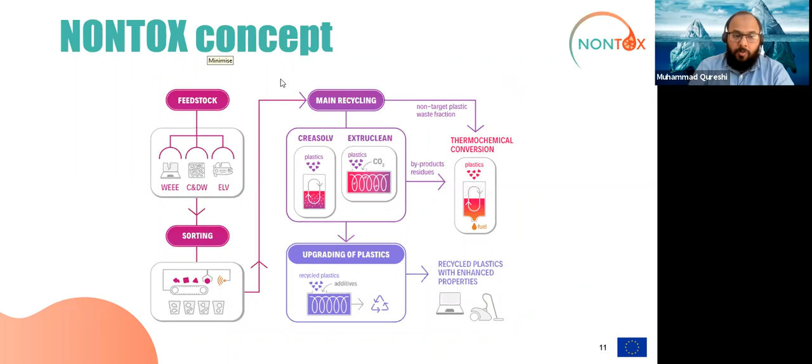So if you press that pointer, this is the first tool in the toolbox of technologies. This is where we are developing at VTT intelligent sorting of the different polymers using an active hyperspectral sensing technique, in which we can classify the plastics containing bromine or flame retardants.

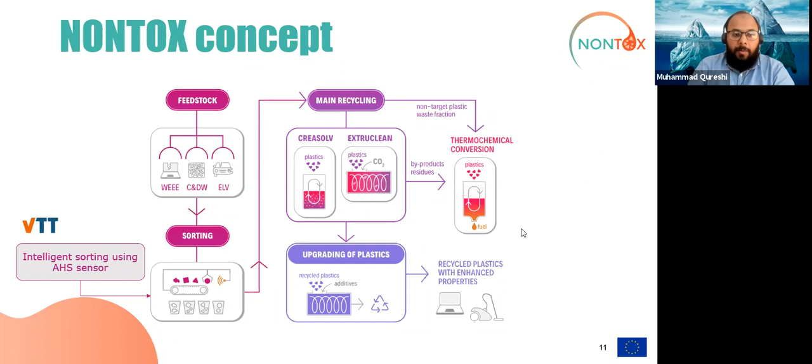So the next step from this sorting is the recycling technique, and in this box you see that there are a couple of these technologies called CreaSolv technology and ExtruClean technology, which we call physical and mechanical recycling technologies. And these are the core technologies used for the recycling of hazardous plastics. Fraunhofer in Germany and AIMPLAS in Spain are looking at these technologies for recycling the plastics containing flame retardants.

Now, as you can see, from the main recycling box there is one arrow going towards thermochemical conversion, which is basically the non-target plastic waste fractions. So if we broadly classify the plastics, there are the ones that are suitable for this recycling technology in CreaSolv and ExtruClean, but then there are the ones which contain contaminants and are not suitable for these technologies. So those non-target plastic fractions are still treated with thermochemical conversion technologies, and also the byproducts and residues coming from the main recycling technologies are directed to the thermochemical conversion technology.

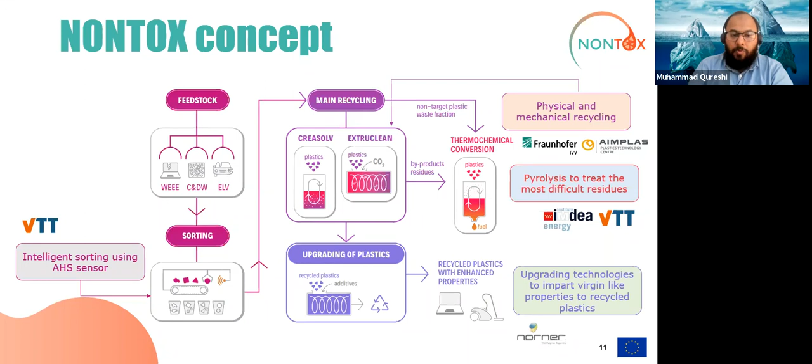In this case, it is pyrolysis, and pyrolysis is the core technology which is now treating the most difficult residues, and it's being developed at IMDEA in Spain and VTT in Finland. So with the thermochemical conversion technology, you can convert the plastics into valuable hydrocarbons. The arrow coming down from the main recycling technology is basically the recycled plastics, which can then be upgraded with the use of special additives to get to a point where these plastics can be used in high quality applications.

So as you can see, we can finally go to applications where virgin-like properties are needed. So the recycled plastics from these technologies can compete very well with virgin materials. So this is how we are trying to close the loop of the plastic waste, by not letting any of the plastics move out of this whole value chain.

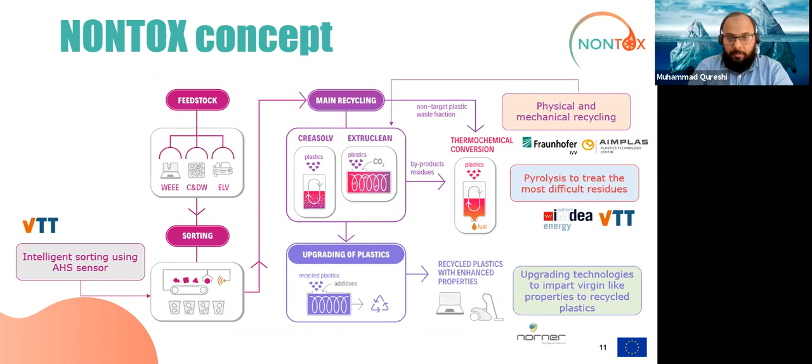To the next. And then if I talk briefly about the potential impacts that we estimate from NONTOX. We see that with this concept we are able to recycle approximately more than 2 million tons of these types of plastics each year in Europe. We estimate up to a 74% increase in the recycling capacity in Europe with the use of these NONTOX technologies. We can also assume with our approximations that approximately 2 million tons of greenhouse gas emissions can be avoided. We also believe that approximately a threefold increase in jobs can be seen with the use of the NONTOX concept in the recycling sector.

Then I'll talk briefly also about the policy recommendations. In the NONTOX project, we had the task to investigate the landscape of the different regulations, frameworks and directives encompassing the whole NONTOX concept, how this type of plastic waste is currently handled, and what the relevant legislations are that affect the whole value chain. So we have looked into different regulations, POP regulations, REACH regulations. We have looked into RoHS criteria.

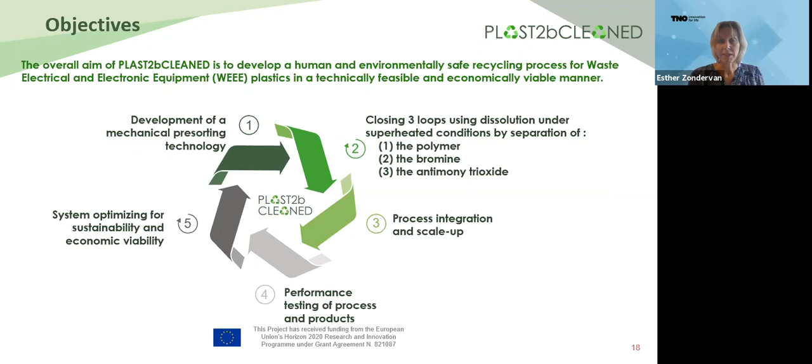TNO is coordinating this project, and we are not doing this alone. We're working with research institutes Fraunhofer and Gaiker. What's important is that we connect the whole value chain to this project: Coolrec as a recycling company, Ducam for the engineering and process equipment, and Elex as a plastics producer of ABS.

Electrolux is end user of the plastics. ICL handles bromine recovery and connection to the chemical industry, and for antimony recovery we have Campine on board. We also have Sustainable Innovations for dissemination and exploitation, which Marianne did an excellent job presenting today.

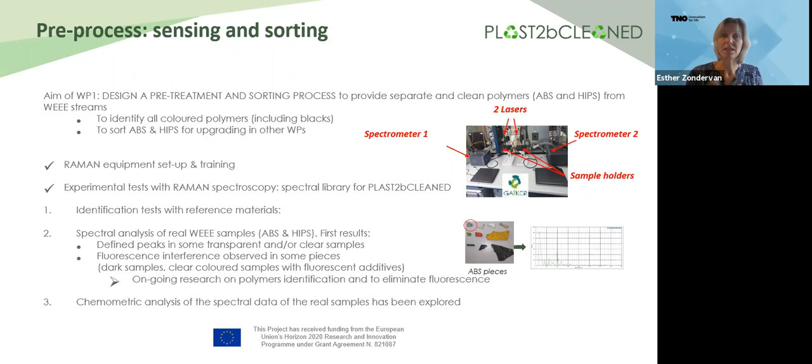So where are we now? We set up our equipment, made a library, and we are now optimizing for the colored and dark samples. This is ongoing research.

The next step is the dissolution technology, where we recover the polymer, the antimony trioxide, and the BFRs. This is currently running at lab scale, and we are preparing to scale up to TRL 5-6.

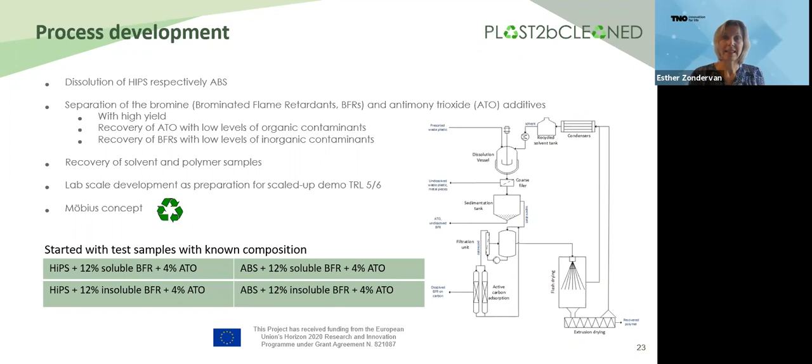At lab scale, we are now at about 100 gram scales, and we started with the preparation of test samples with known composition, making typical variations of the sample. Both HIPS and ABS were used, with both soluble and insoluble brominated flame retardants, to check our process. Here you can see some of the process.

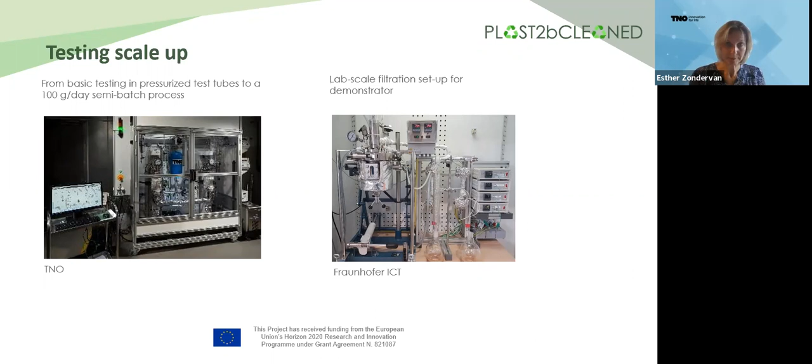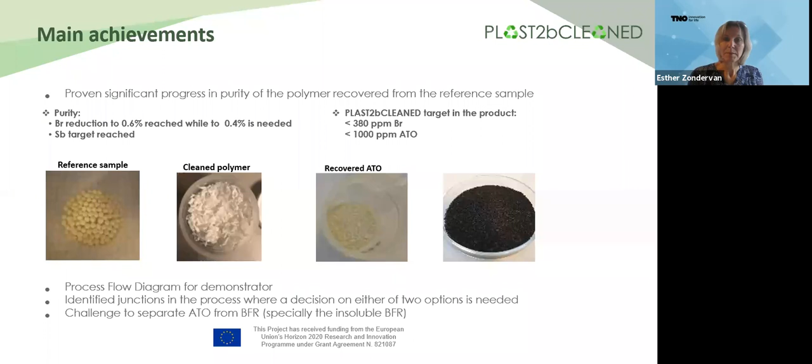As I already said, we do not only look at the technical issues of this process, but also for the economic and environmental assessment. And from the economic assessment, we already see that this process is in principle economic viable.

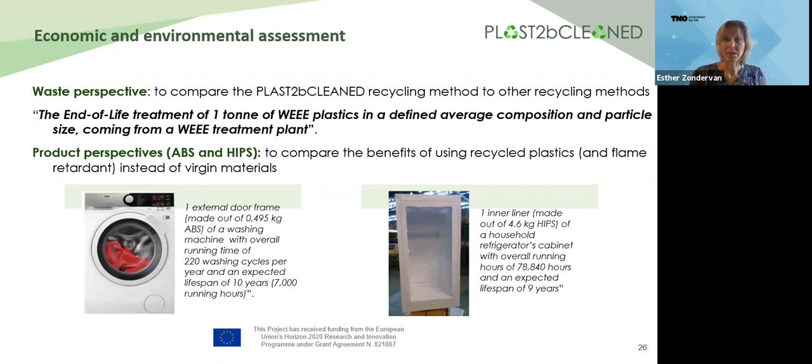Also from a sustainability perspective, we looked at the impact for the environment, and we did that in two ways. We looked at the product from a product perspective, as you can see there on the lower picture: one is the door from a washing machine, and the other one is the inner liner from a refrigerator cabinet. And that is from the product perspective, and also from the waste perspective. We just looked at the end-of-life treatment of 1 ton of WEEE plastics, and then compare it to an incineration, which is done currently.

Here you can see some of the first results. We're now performing an in-depth life cycle assessment, but this is just from the scan. There you see that we see a clear improvement by using the PLAST2bCLEANED process for HIPS and ABS. So this is the comparison of brominated HIPS and brominated ABS compared to municipal waste incineration, with energy recovery. Here we looked only at the polymer, but we look now also in the in-depth scan at the benefits of the bromine and of the antimony trioxide.

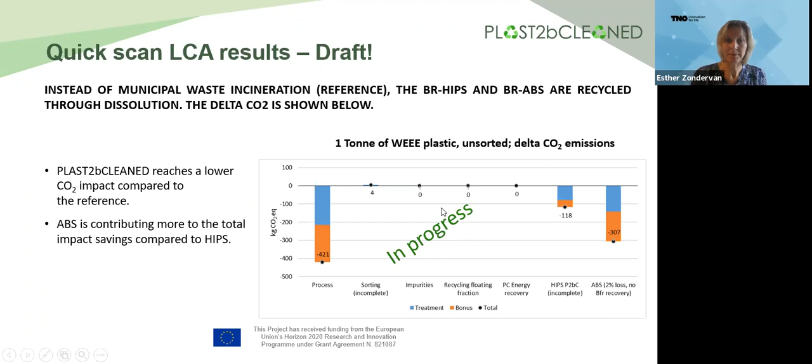So then I'm coming to the end of my presentation, and I would like to finalize where I started. I think with PLAST2bCLEANED, we are very good on our way to develop a nice process for the mechanical sorting technology, so sorting the different types of plastics and whether they contain brominated flame retardants or not. Then closing the 3 loops for the plastics that contain brominated flame retardants, for the polymer, bromine, and antimony trioxide. The scale up to TRL5-6 scale, performance testing, so do they comply with the REACH legislation, and that all in an economic and environmentally sustainable way.

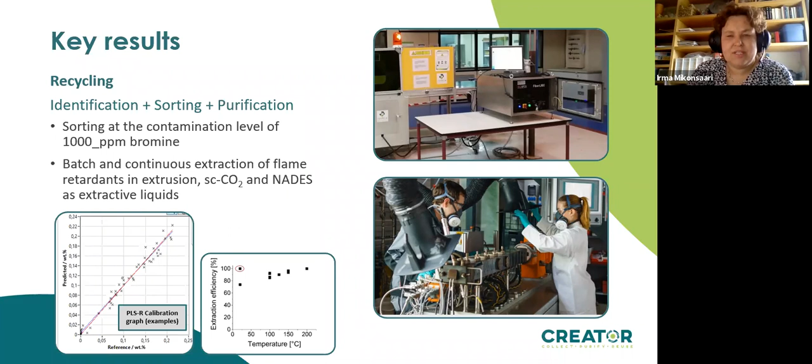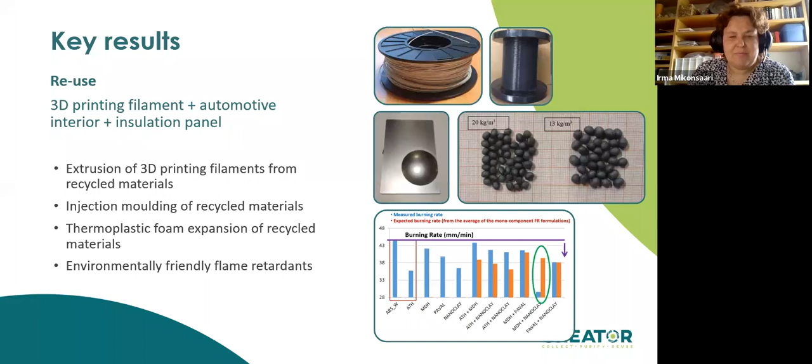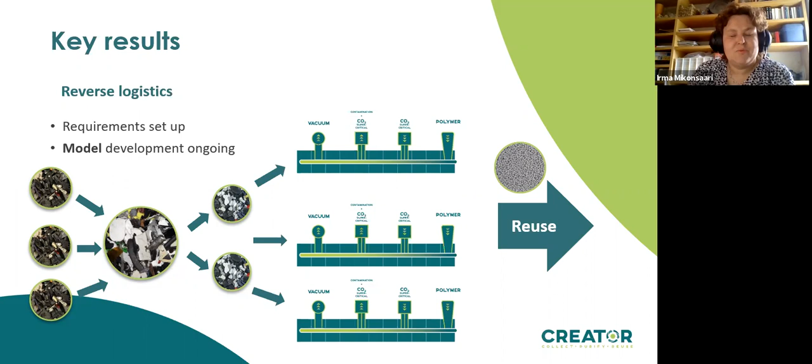This is on our reverse logistics development. We have set up the requirements for the CREATOR process and how the logistics should look like. At the moment, the Kühne Logistics University is developing a model of how this fits together, simulating the supply chain, taking into account the location, size, and number of the different recycling plants, and what steps are carried out there, to work out the best possible economics. It's a matter of whether I do the whole sorting at one place, or separate it into two, how big the volumes are that I have to treat, etc.

And this turns, of course, into social and economic benefits. Recovering the petroleum-based materials and reusing them will make us more independent from sources outside Europe, decrease imports, and make us more resilient. This will carry on to a more circular model for plastics, especially thermoplastics.

And doing so and installing those plants in Europe, this will, of course, secure also these jobs in that sector. And on a longer term, of course, these technologies we have developed can be applied to other waste streams and other applications as well. So all in all, we are, of course, working on that the recycled plastics are not anymore called waste, but that they are really a valuable secondary raw material.

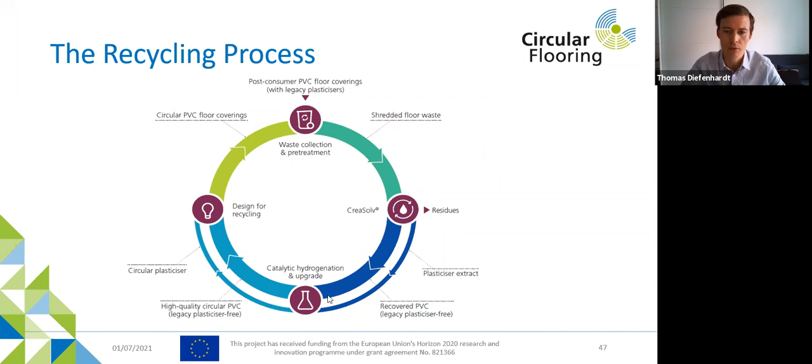The PVC is recycled and then brought back into new flooring, and the legacy plasticizers are treated by catalytic hydrogenation and made safe again, and then are re-implemented as well into the PVC, into the new floorings with additives. The next slide, please, will show in more detail the tasks that we have in our project.

So we can start from the top, where we can see that the post-consumer PVC or end-of-life PVC is collected and sorted. It then gets to the CreaSolv plant, where it is recycled by the CreaSolv process. Here we have the two streams, the blue one, which is the PVC, going back to reprocessing, and the plasticizer stream, the yellow one, where the plasticizers are catalyzed by hydrogenation, and then the safe plasticizers are again brought back into the new floorings, which are then supposed to re-enter the market.

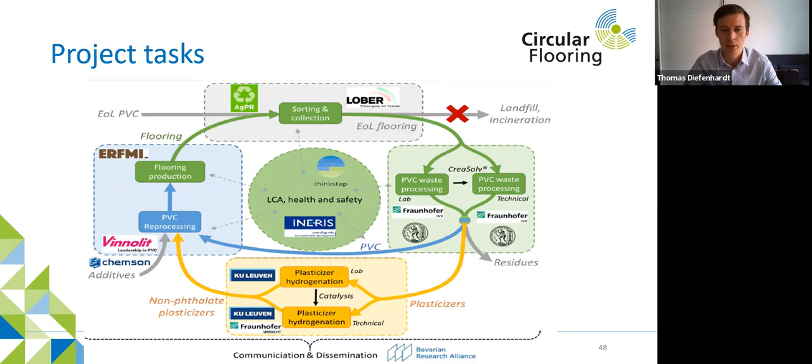Next slide, please. So the two key technologies I already mentioned are the CreaSolv process and the hydrogenation technology. The CreaSolv process is a solvent-based recycling technology which enables these resources to be conserved by mainly separating these two, let's say, resources, the PVC and the plasticizers. It uses specific solvent formulations that do not contain hazardous substances as defined by the EU chemical legislation. And the PVC is dissolved from the flooring formulation. It is then precipitated and dried for the reuse. The hydrogenation is a catalytic hydrogenation, and it converts these phthalate esters to safe plasticizer alternatives.

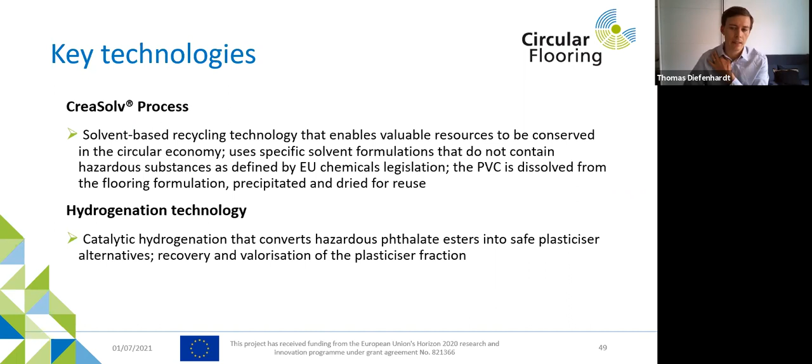Next slide, please. So more in detail for the CreaSolv process: the waste enters the process and is dissolved. It is then cleaned in various cleaning steps depending on how dirty the input material is. Impurities are taken out of the polymers. The polymers are then precipitated with an anti-solvent and are then dried. Even in the precipitation step, impurities can be taken out depending on how it is performed. And the solvent that is used is regained in a closed loop. So it's a closed process basically.

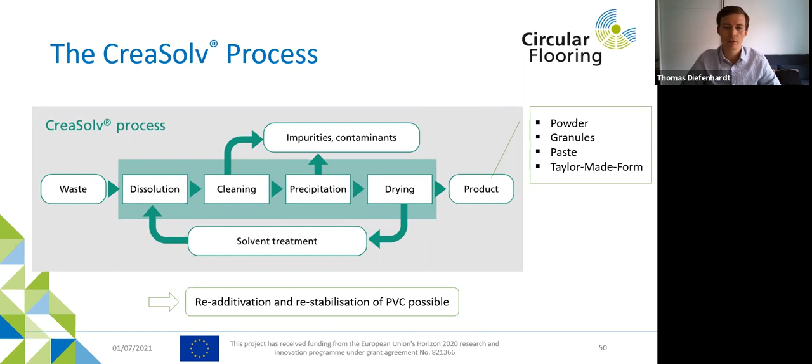And the finished polymers can be produced as powders, granulates, and pretty much any tailor-made form. In the PVC industry, the PVC is applied as powder, therefore our product is a powder as it is produced after our process. And within this process, a re-additivation or stabilization of the PVC is possible. Next slide, please.

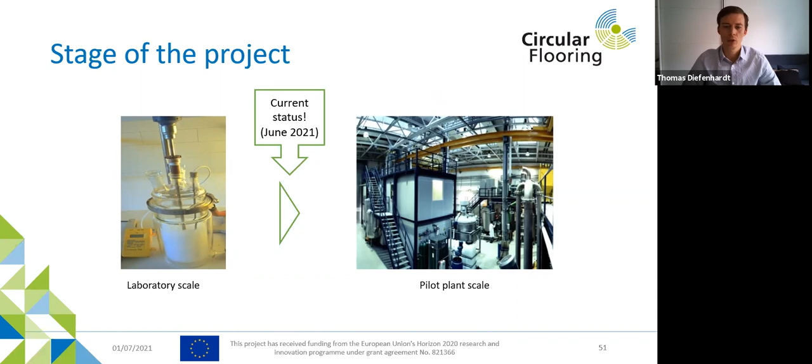The stage of the project at the moment is we just proved everything on laboratory scale and are moving on to the pilot plant scale. And next slide, please. For this, we are building a pilot plant, which is almost completed in the building, but is not yet filled with all our equipment. So this is the stage we are at right now. We are building the pilot plant to be able to demonstrate that this process also works on a larger scale. And since we have proven with our partners that it is also economically feasible and worth it, we also want to prove this on a larger scale.

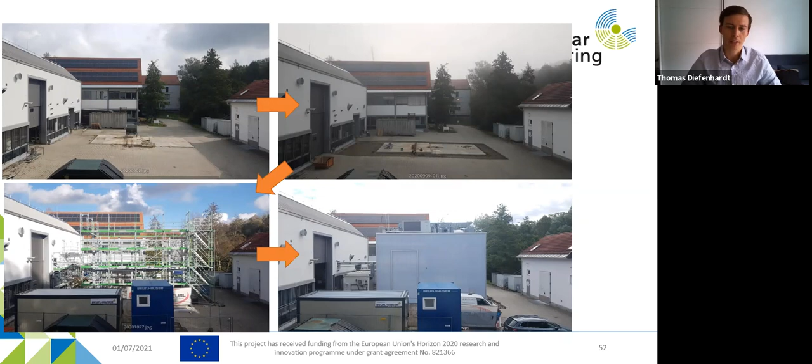The PVC in the last months has been improved especially in the particle size, because the tear strength, elongation, and heat stability were always good characteristics for it to be implemented into new floors. But we had some issues with the particle size, since PVC powder is very fine powder, and we are now at a stage where we have particle sizes of below 500 micrometers, and this is around what the industry would accept, even though it would be best to have even smaller particles, which we're trying to reach.

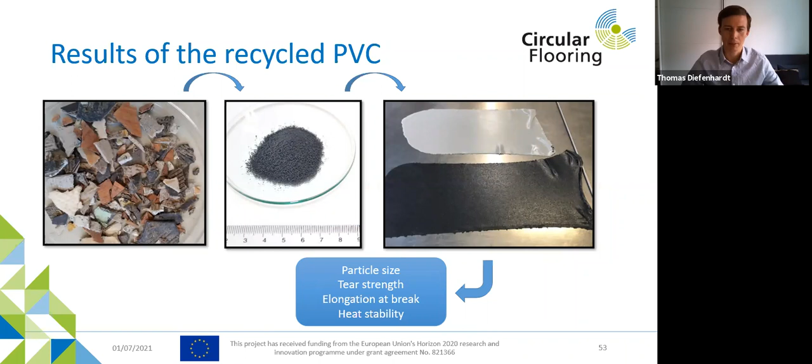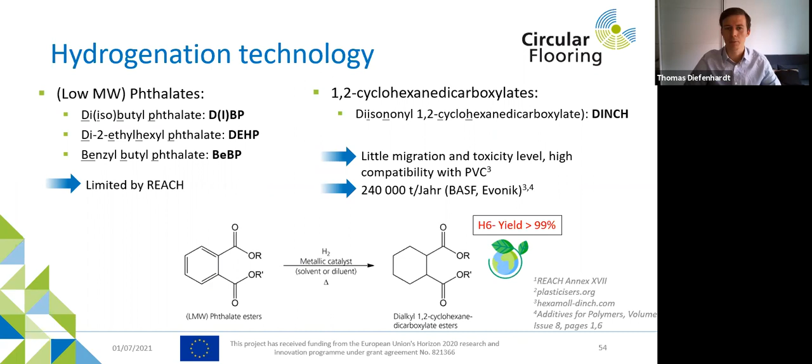We are not producing a new phthalate, a new plasticizer, by this catalytic hydrogenation, but a plasticizer that is already on the market, and therefore we hope to not have to do a whole new registration for this plasticizer, but this is something we have not yet tackled. Next slide, please.

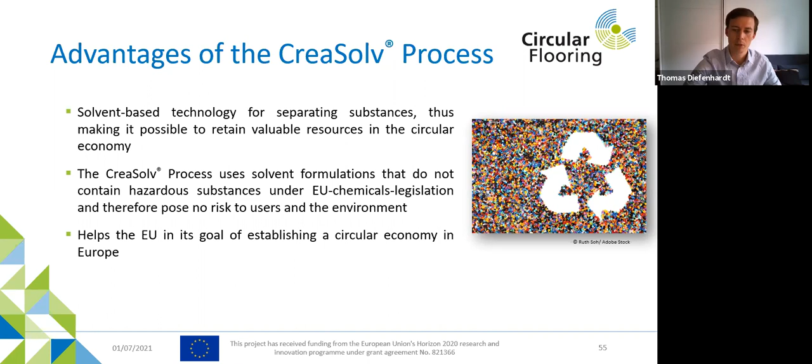The advantages of the CreaSolv process, as already mentioned, are especially that this solvent-based technology separates the substances, in our case the PVC and the phthalates, the plasticizers, and thereby makes it possible to retain these resources and keep them in a circular economy. It uses solvent formulations that are not hazardous substances, and they therefore do not pose any risk to users or the environment. And thereby it helps the EU reach its goals of establishing a circular economy in Europe. Next slide, please.

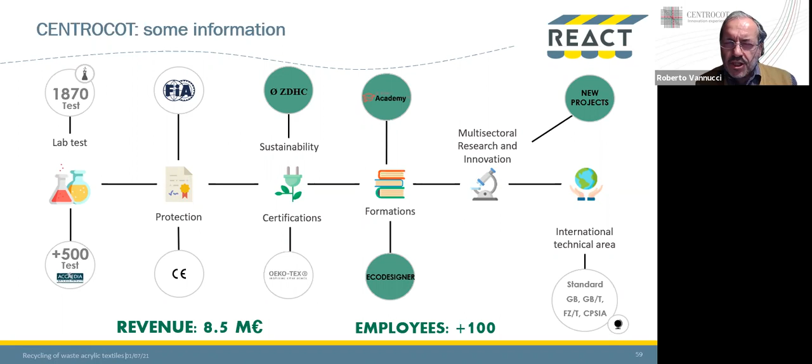Really, we are not focused on plastics, but on textiles, even though acrylic fibers that we are working on are a kind of plastics, of course. I'm Roberto Vannucci. I'm responsible of the multi-sectoral research and innovation department of Centrocot. Next slide, please. Just a short overview of Centrocot. It is a technical textile center located in northern Italy, near Milan, and Centrocot is the project coordinator of REACT. Next slide, please. Thank you.